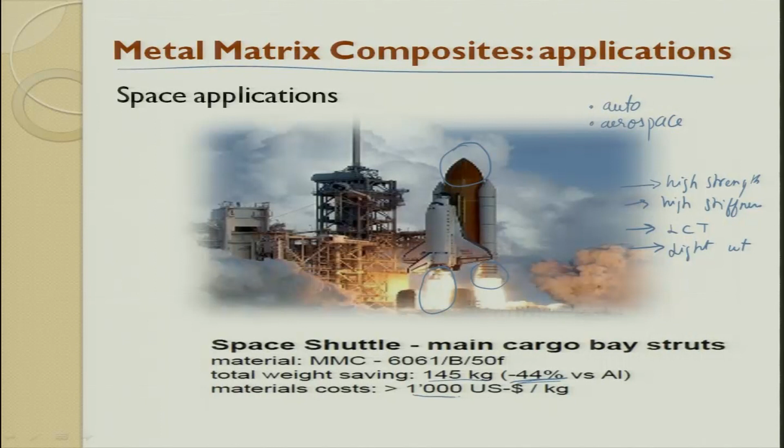Next is the automobile industry. The automobile industry had a huge impact for the common man, because fuel efficiency is one, and then they also try to enhance the stiffness. So, the moment the stiffness enhances, during an accident or crash, these materials try to yield and transfer energy such that the passenger is slightly safer.

So, the brake drum is made out of metal matrix composite. Earlier it was made out of cast iron, now it is made out of metal matrix composite. Wheel rims, titanium rims are coming up today with metal matrix composite, and then you have the piston, which has been there for a long time, coming out of metal matrix composite. They make it through a process called stir casting; we will see the different processes later.

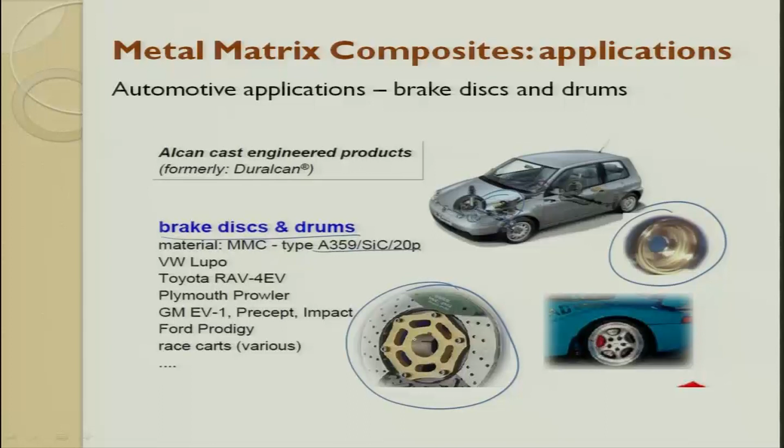So, basically if you can make a casting from a metal alloy, then all these things can also be made through metal matrix composites. So, the brake drum and brake disc were a big advantage. There we used aluminum reinforced with SiC particles. This is used in the Toyota car company, and all the major giants started pushing very hard. So, the engine is now made lighter, the silencer is now made lighter. Silencers are made today out of titanium alloys, and these titanium alloys now move towards titanium composites.

The other thing is you can see the front and rear discs. These discs are completely made out of metal matrix composite, and they are all made out of aluminum. This is an aluminum alloy, aluminum, Si and Mg, reinforced with SiC, and it is particulate. So, that is what is told here. The moment they do this, the disc temperature enhances, and the moment the disc temperature enhances, the efficiency of braking enhances.

So, the car weight is nowadays also reduced. The moment you reduce the car weight, the mileage goes high. That is what people are looking for, because of carbon footprint and other things: less pollution, longer distance of travel and safer travel. So, that is why composites are coming up in a very big way, and wherever there is high temperature, wherever a strength point of view or a thermal point of view comes in, we replace it with metal matrix composite.

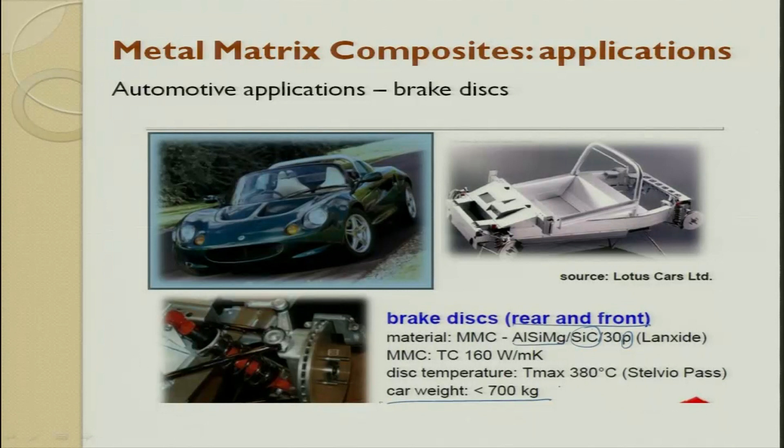Drive shafts are another big example made today out of metal matrix composite. This 6061 is the alloy, reinforced with particulate alumina, and it is used by different companies; GM, Ford, all these people are using it for their drive shafts.

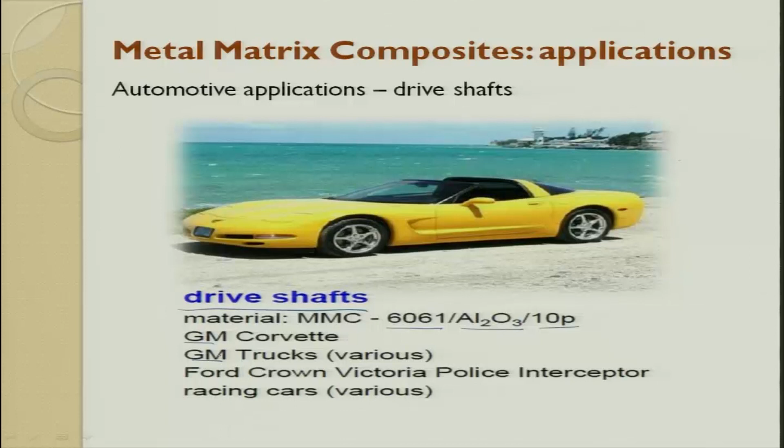So, engine parts. I told you this is an engine block which was earlier made out of cast iron; from there it went into aluminum. Today people are making it out of titanium, and from aluminum and titanium they are slowly getting into the field called metal matrix composites. So, here aluminum reinforced with SiC is done, aluminum reinforced with alumina is done, Ti with TiCN and TiN are also tried.

They also try to reinforce with particulates or even short fibers. The only difference is aspect ratio, length by diameter; a short fiber will have a longer length. You can also try to reinforce with whiskers. So, if you see here, the rest of the portion will be made out of aluminum alloy, and only the top portion will be made out of metal matrix composite.

This portion alone will be made out of metal matrix composite, wherein ceramics is reinforced. With the ceramics, what they do is make something like a preform, and in the preform there are a lot of vent holes, or some gaps in between. So, through this gap the aluminum is pushed inside.

So, we will see the process. When you study the process in depth, you will understand how these applications are being made. This is done by squeeze casting methods. These are liners which are used, and they are also made out of metal matrix composite. All the big giants, GM, Toyota, Hyundai, are trying to replace with metal matrix composites.

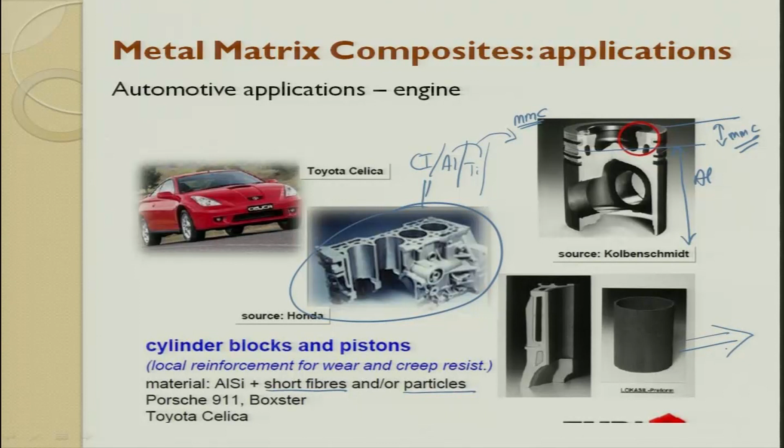Train. Today in trains, the number of coaches has increased from 16 coaches to 24 coaches, at least in India. They are all 21 to 24 coaches, and if you talk about goods trains, they take 50 coaches. So, the biggest problem is the braking system. The moment you apply the brake, it has so much momentum, it keeps pulling for almost a kilometer and then stops.

So, if you want instant braking, and discs which can withstand very high temperatures, then metal matrix composites are tried there. So, braking discs and braking drums are today made out of metal matrix composite. They are made lightweight so that they can increase the mileage, and they can withstand high temperatures.

So, the weight of the disc is 74 kilos, which replaced cast iron. They got a weight reduction of 38%. So, the total weight saving is 10 tons for a train. On successful testing, they could go over 1 million kilometers.

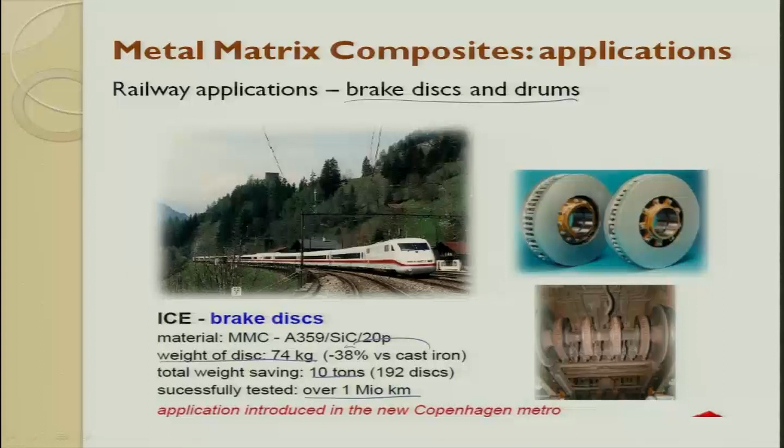In trains, railway coaches and railway engines, they are making copper based composites to withstand high temperature. And circuit breakers, which were earlier bimetallic, are now made out of copper alloys, and discs made out of aluminum are also made out of copper reinforced with graphite so that they give lubrication. So, all these things are now tried in a big way.

When you go to a plane, wherever it was possible, 50% of the parts are now made out of metal matrix composite. They are made out of aluminum metal matrix, titanium, steel and others. These are the applications. So, where do we go for titanium? Wherever you want weight reduction, we go for titanium.

But what is the biggest challenge? Why are people not going exclusively for titanium castings compared to aluminum? Processing of titanium is difficult. Mixing titanium alloy with particulate composite without having a reaction is a big challenge, whereas with aluminum it is very easy. That is why people prefer aluminum, since processing is easy. So, aluminum is used as well as titanium; titanium processing is a little difficult.

So, if you see, at all the exits you see titanium, because of high temperature. Wherever there is not much load, but you still need some strength, you see aluminum. These are some of the places where aluminum is used in a plane, and you can see that even now steel is used, and other composites. Wherever there is hot exit air, they always go for titanium alloys or titanium metal matrix composites.

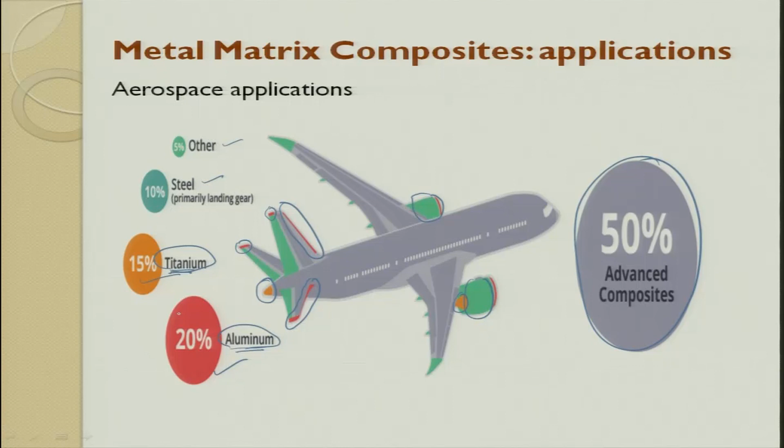So, these are something you should make sure of, and when I say others, these are all rare types of metal matrix composites which are used for particular applications. So, in the aerospace industry it is also used. This is what we saw in a previous figure. You have fan exit guide vanes which are all made out of titanium today.

Lightweight. That is why people are making it, and interestingly, whatever casting process you used earlier can be used, but keep in mind that now you are adding to the alloy some reinforcement which is lighter weight, so there will be a difference in density. So, you should make sure that it is homogeneously distributed, or if you want functionally graded, that is also possible. Functionally graded means the property changes with respect to distance.

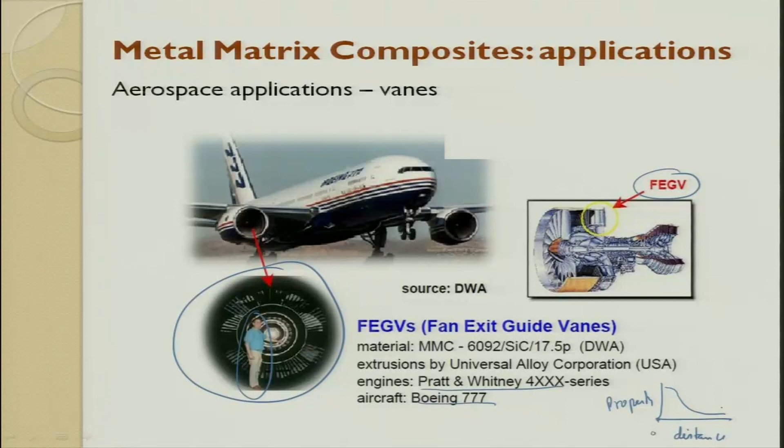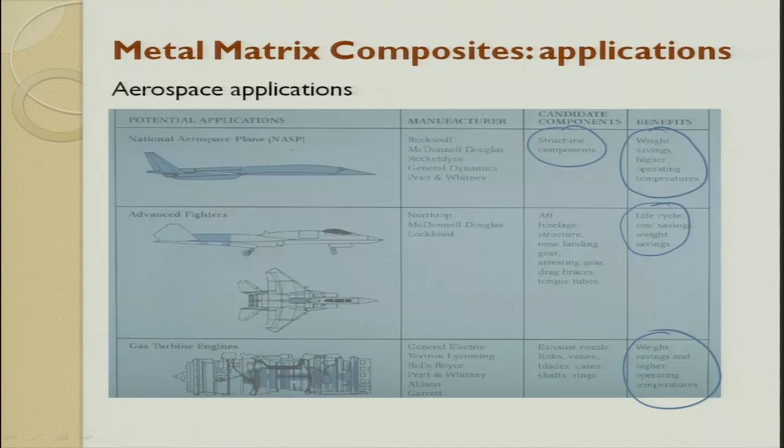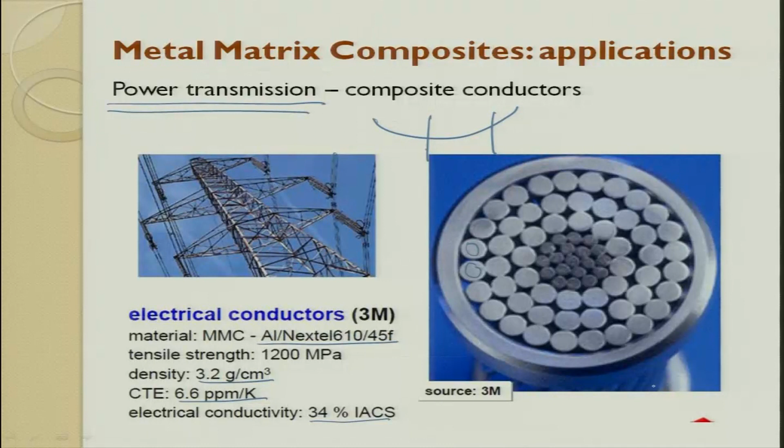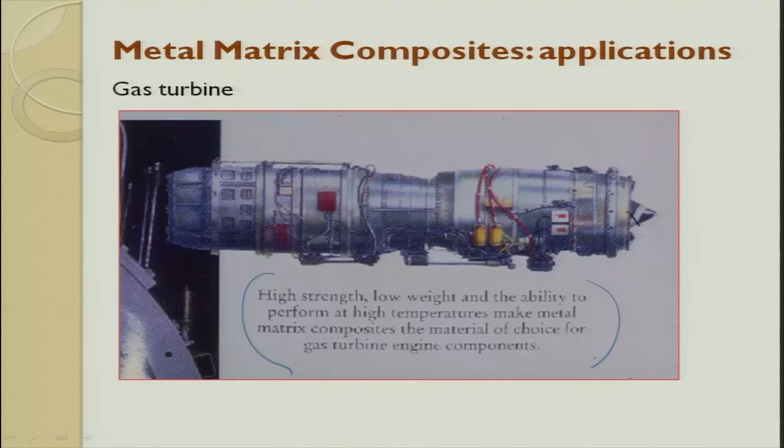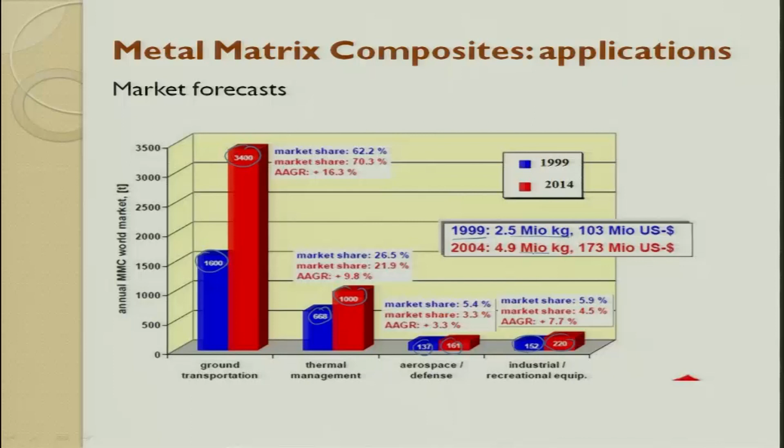So, with this we come to the end of the lecture, in which we have seen a lot of applications and the introduction of metal matrix composites. I have given enough basic knowledge for you to appreciate metal matrix composites.

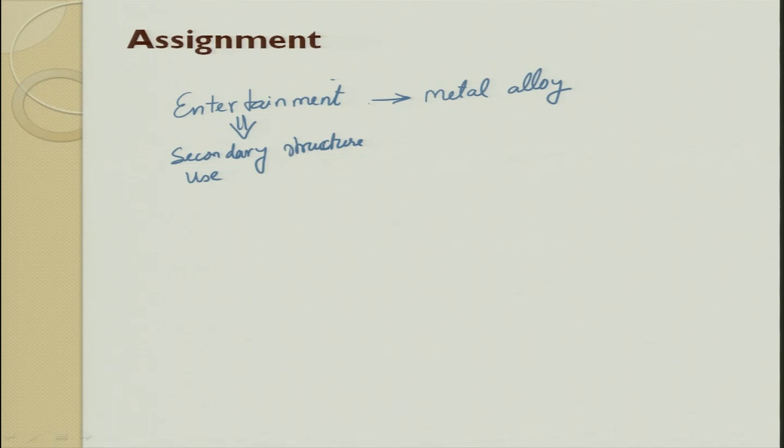So, I would like to give an assignment. Try to look at any entertainment industry, and see where all they have used metal alloys. People might ask, what is the entertainment industry? It is where there is secondary structure use. There is a lot of secondary structure use. So, wherever there is a metal alloy, can you replace this metal alloy by composites?

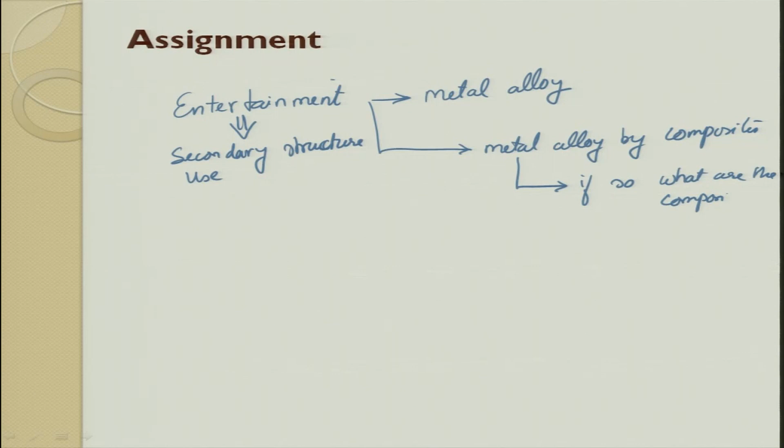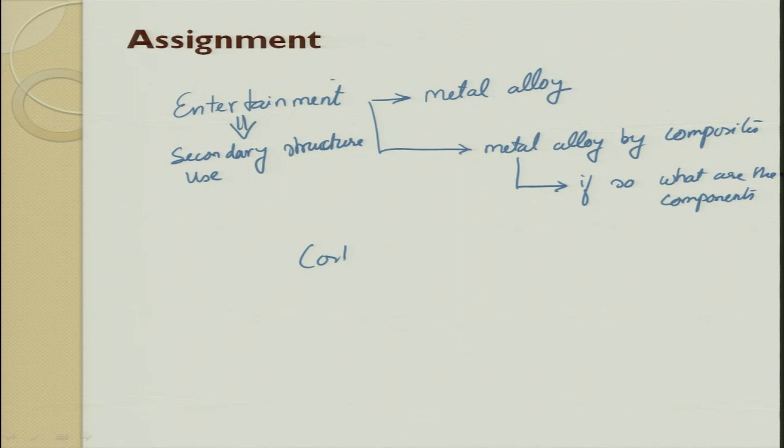If so, what are the components? Just try to make a list for yourself, and then try to see whether it is worth making. And here keep in mind cost. Cost is a major factor. Keep this in mind, and then look at all the entertainment parts and see where metal alloys are used.

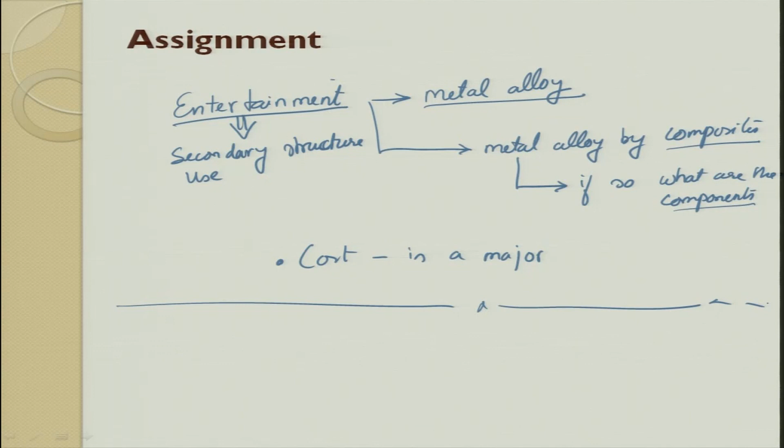Can these metal alloys be replaced by composites, and if so, what components will you do? Keep cost as a major thing. That is very important, and then try to make a list. You do not have to submit. Have an assessment for yourself, and if you cannot find out from live examples, you can of course use the internet and browse to understand how people decide whether an alloy has to be changed into a metal matrix composite.